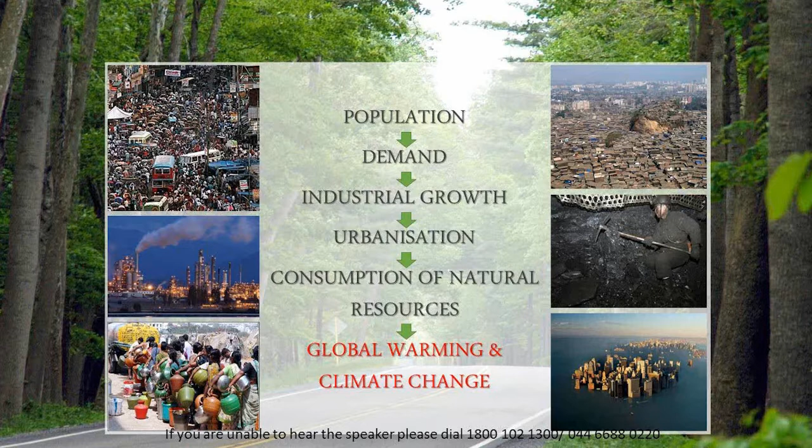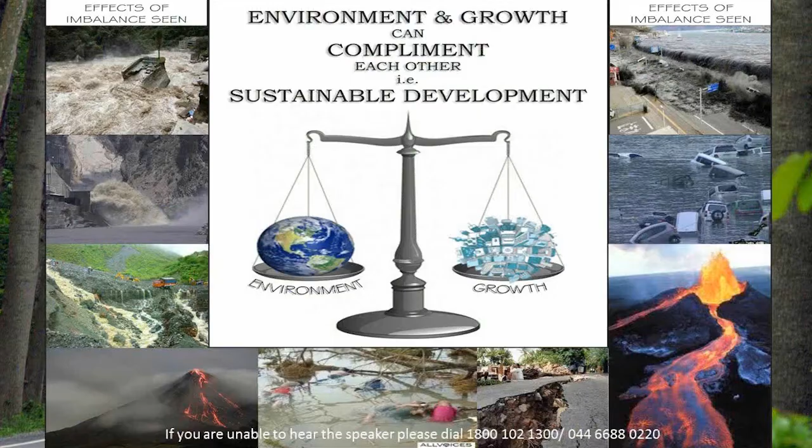But let us understand, environment and growth can complement each other. This is the need of the hour, that is sustainable development. It's the very best solution we have. This is green buildings, which is the best solution.

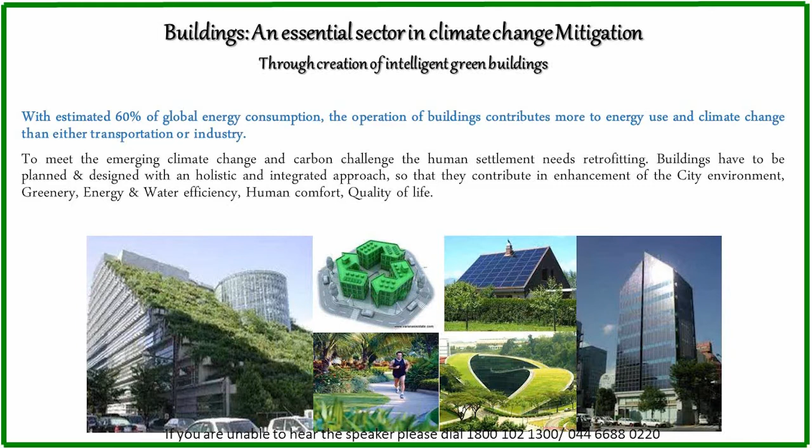With an estimated 60% of global energy consumption, the operation of buildings contributes more to energy use and climate change than either transportation or industry. Very strange. So to meet the emerging climate change and carbon challenge, human settlements need retrofitting. Buildings have to be planned and designed with a holistic and integrated approach so that they contribute to enhancement of city environment, greenery, energy and water efficiency, human comfort, and quality of life for all of us.

Do we know all these missions of the country? India's national plan for climate change has 8 missions. If you see the 8th mission, that's about the National Mission on Sustainable Habitat, which talks about the need of green building design practices with an integrated and holistic approach to achieve this target. So green buildings will contribute a lot to the action plan for climate change and sustainable development of the country.

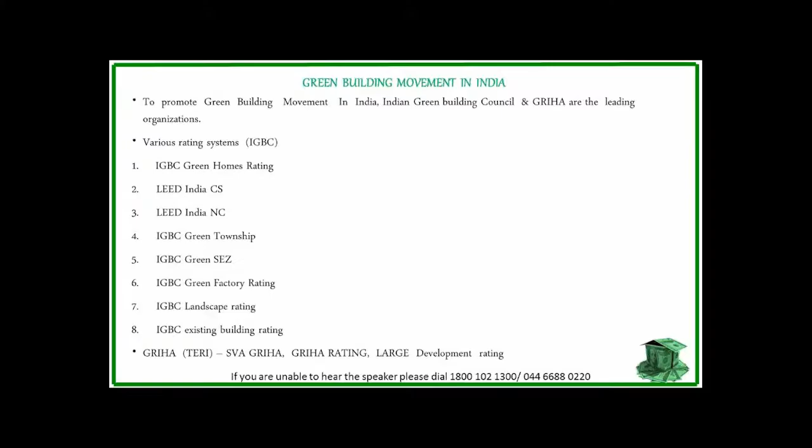Let us understand the green building movement in India. To promote the green building movement in India, there are 2 organizations: one is Indian Green Building Council, and GRIHA. These are the leading organizations working tremendously in the green building movement in India.

Various rating systems have evolved with the help of all stakeholders from the construction industry. They are specifically for different categories of projects, like IGBC Green Homes Rating, LEED India Core and Shell, LEED India New Construction, IGBC Green Township—that's for infrastructure as well—and IGBC Green SEZ, IGBC Green Factory Rating, Landscape Rating, which is newly launched, and a very new existing building rating system which is just launched last month.

During the Township Conference, and for GRIHA in India, we have SVA GRIHA for smaller projects, where your project size is less than 2,500 square meters. GRIHA rating is applicable for residential, commercial, government buildings, and various institutional buildings.

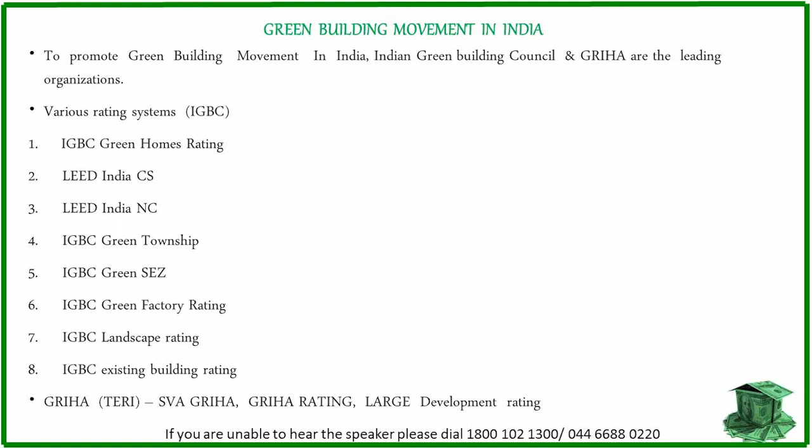There is also a new rating system currently launched by GRIHA, for larger development. It is applicable for buildings where you need environment impact assessment, where your plot size is bigger, and your built-up area is more than 1,50,000 square meters. So that is basically a larger development, and this rating also complements the Environment Management Plan of the EIA notification 2006.

Now let's have a quick view of the IGBC certified projects across the country. Currently the number is very big, exceeding more than 350 certified buildings, and 2 billion square feet is already registered with IGBC green building. So the movement is going on very nicely.

Let's have a look at the GRIHA certified projects. It also covers residential, individual homes, commercial development, townships, and even government buildings.

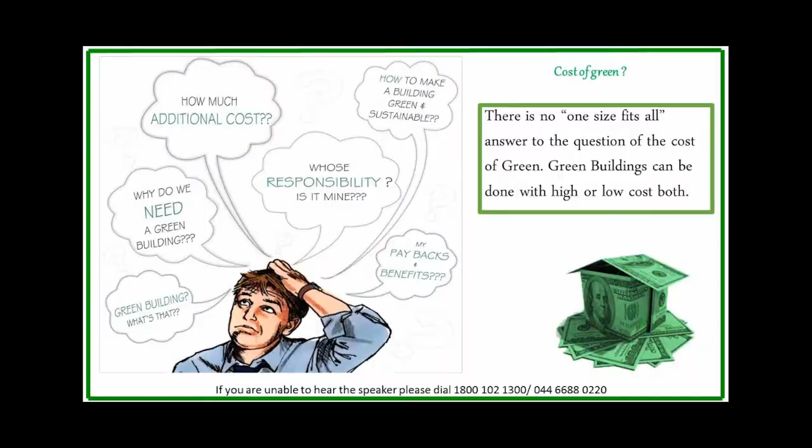Now let's come to the topic of the presentation, which was about the cost of green. There is no one-size-fits-all answer to the question of the cost of green. Green buildings can be done with high or low cost, both. It depends how we design, it depends on the expertise, it depends on the competence level our project team has, and whether they have a better understanding about the sustainability parameters.

When we design a building, the first question that comes to mind is: how much additional cost? How do we make a building green? What is green, what is sustainability, and whose responsibility is this? Is it me, the developer, the occupant, or the government—who?

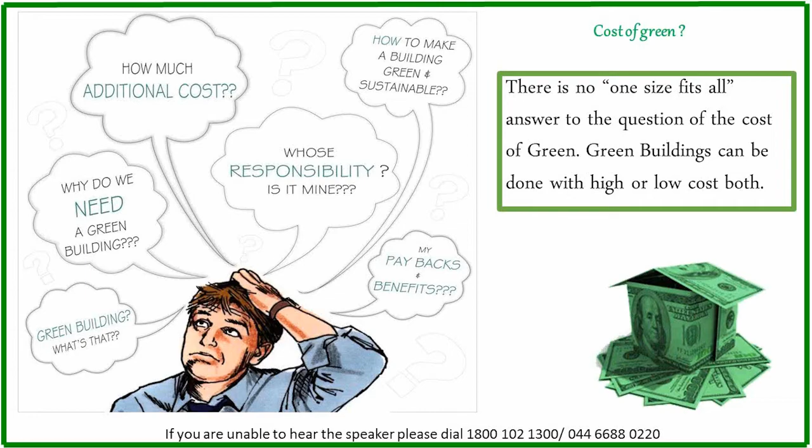So let's talk about the stakeholders of the construction industry. Is there any one single stakeholder, or are we all stakeholders? We have identified construction stakeholders which cover government also, who provide policy for construction, building codes, etc. They basically regulate and monitor, identifying policies at the regional and central level. So government is also a very strong stakeholder.

And building users who are finally going to stay in the green building - they also need to be educated, they need to know about green building. Then other stakeholders are the developers. Here the commitment of the developers, their intent to make a green building, is very important, along with the management system approach of the company.

Then architects - how the architect understands design sustainability parameters in the planning is very important. And the rest of the team, like expertise in environmental planners, master planners, infrastructure planners for larger development, and MEP consultants - we need various experts on board when we plan a project. Even when we start construction, we still need a better educated execution team.

They also need to understand the meaning of compliance, their role and responsibility, including our product manufacturers and suppliers. Because the product they are supplying - what green the product is, what is the value of recycled content, embodied energy - we need to understand all the technical specs of the products. So product suppliers should also be well competent in understanding sustainability parameters.

Now let's talk about integrated approach and planning for green building design. Do you think this approach leads to escalated project cost? My answer is no. In fact, this approach minimizes the regulatory risk in planning and also supports climate change mitigation measures. This approach also adds value in the project by providing long-term paybacks and benefits in terms of energy and water savings, and it defines social responsibility, contributing to sustainable development and green economy.

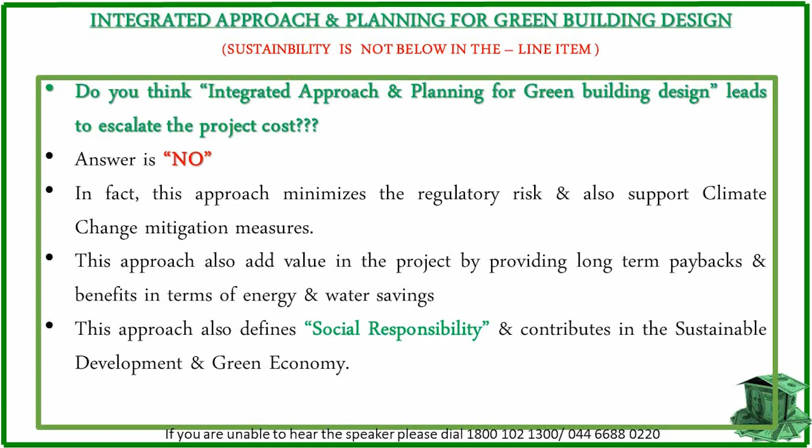So overall, the integrated approach and planning for green building design solves a lot of purpose in the planning itself. Sustainability is not a below the line item, it is a top priority in planning. Global studies done by various experts across the world prove that green buildings do not require additional cost if the design project team has thorough knowledge of green and sustainable parameters and the capability to integrate these features in the planning stage of design.

So the perception of additional cost remains in the mindset of only those people who consider sustainability parameters as an additional feature in the project. When establishing a design and budget for a green building, the key point to remember is that sustainability is a program issue rather than an added requirement.

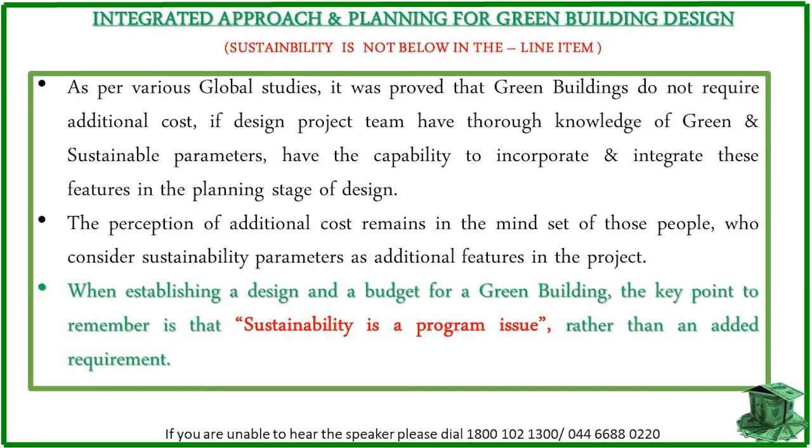The first question in budgeting should not be how much more will it cost, but how will we do this - that is more important for us. This must be done as early as possible in project planning, and considered at every step of design and construction. So we have various strategies, like we need to establish team goals, identify the team of experts we need in planning, and the expectations from the experts also need to be identified.

The kind of experts we need on board, like architects, environmental planners, MEP experts who will look after our HVAC design, plumbing design, water management system, energy management system, landscape designing, and site analysts who give us idea about the site topography and environmental parameters and its impacts on the site. So it's very important to identify the team of experts in the planning.

So that's the integrated approach - we need a complete team on board rather than just a single architect. That means a holistic approach for integration of all sustainability parameters in the planning when we start a project. Understanding of site is very important, understanding of building footprint is very important - this makes our project in a true sense a sustainable model.

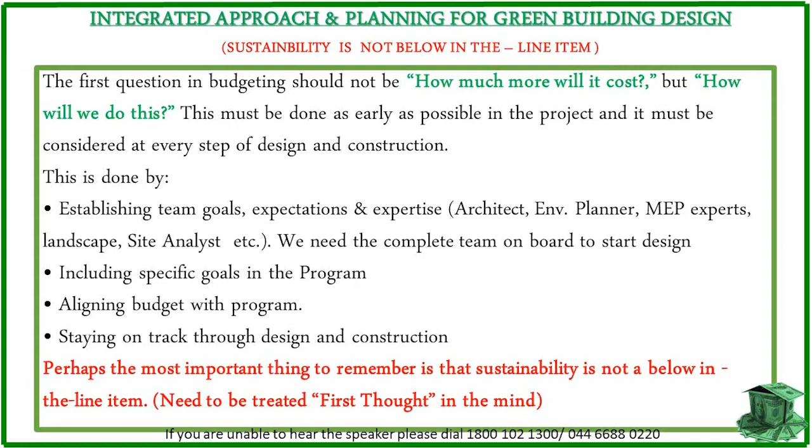Perhaps the most important thing to remember is that sustainability is not a below the line item. It needs to be treated as a first thought in the mind when we start planning any kind of project, whether smaller size, medium size, or a larger development.

Let's talk about synergy of cost with current environmental policy and design regulation codes in India. There is no doubt that better understanding of environmental policy and applicable design regulations and building codes available in each region of India currently to incorporate specified sustainability parameters of the policy and regulations in the planning stage itself will automatically lead to define the exact cost of the project planned.

Because everything is well planned and it's a part of your planning, whatever you need as per the legal bylaws. So we are not avoiding any condition or any parameter which was part of your legal codes. Hence, there is no point of additional cost if you know how to incorporate all those building codes and design codes mandatory as per the legal bylaws in the planning.

There is a notification under EIA, Environment Impact Assessment, by the Ministry of Environment and Forest. Environmental clearance is mandatory for all construction projects having built-up area, meaning total covered construction area, more than 20,000 square meters. That means if your construction area is more than 2 lakh square feet, environmental clearance is mandatory for you to get from the state environmental appraisal committees.

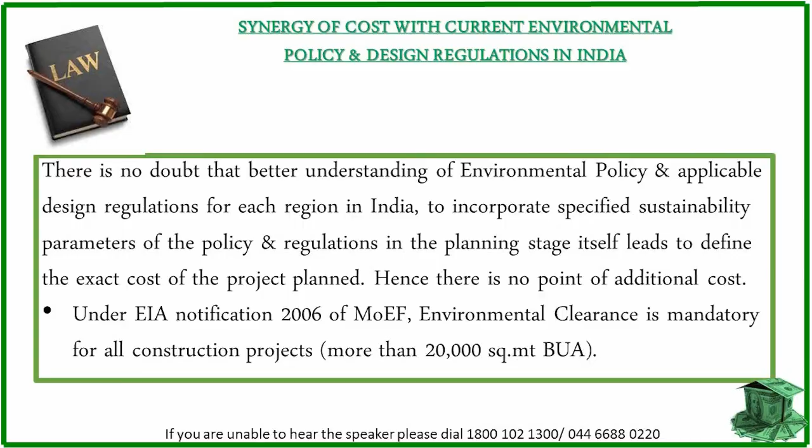The following sustainability parameters have already been covered as a mandatory protocol of project design and implementation in India, which covers site planning. Site planning has to be as per the National Building Code, which itself talks about your topography, the landscape design during construction and post-occupancy, soil erosion control measures, and the sedimentation control plan. So all site planning as per environmental conditions is already covered in the National Building Code.

Not only this, there is another chapter in the National Building Code now which purely talks about sustainability parameters and how to do sustainable development. It covers all the parameters. Even in design planning, as per the current National Building Code, we need to understand climatology and orientation of the building. Then for energy management and design, we need understanding of the Energy Conservation Building Code, so we can design our building envelope efficiently with energy efficient technologies.

Water management and design is also covered by the National Building Code, Bureau of Indian Standards, and Central Pollution Control Board, which talks about water quality norms for potable water, wastewater quality norms, treated water norms, and even irrigation water quality parameters. So all these codes are there, only the challenge is the implementation.

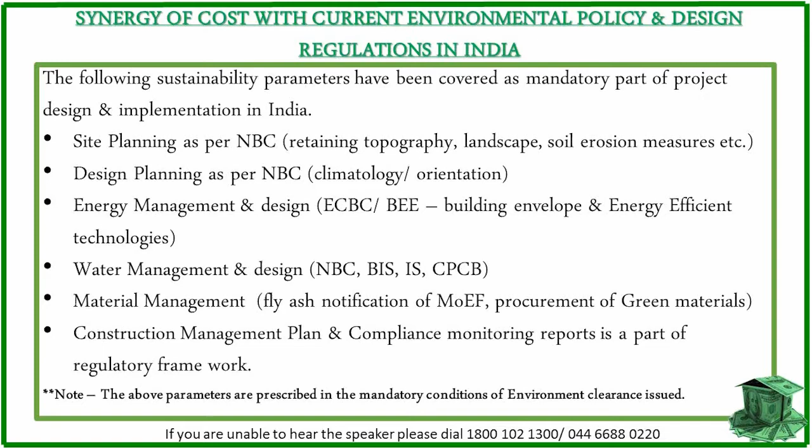In fact, environmental clearance conditions clearly define that the occupancy certificate should not be issued to a project until all environmental infrastructure and sustainability parameters have been installed, commissioned and validated by local corporation bodies. So such an important thing is already in place in the legal codes, but we need to address the challenges.

There is a lack of environmental policy awareness in the architectural education system, because most architects don't know about environmental policy. I'm not talking about experienced architects, but the young students who are studying now. They need to be educated. The intent of developers to implement required mandatory norms is also very important, and understanding of paybacks and benefits for the developer is also important. Government incentive schemes may encourage the same.

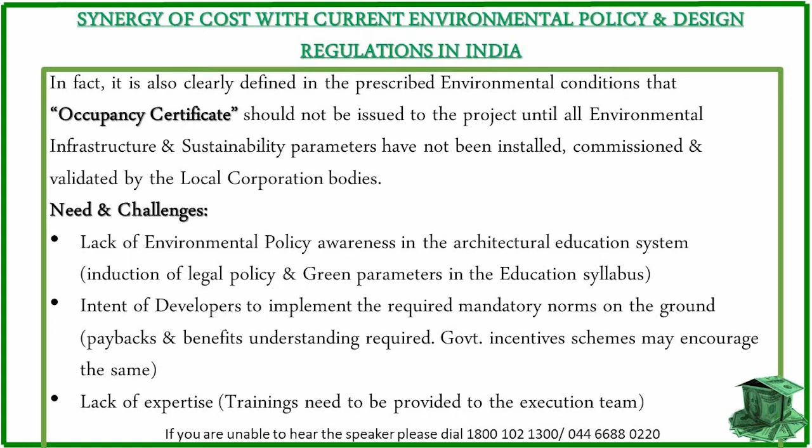There is also a lack of expertise. Training needs to be provided to the execution team. Then who will provide the training? There are so many challenges.

Even so, if you see current regulations in India, some states, I would appreciate, have already initiated incentive schemes for their regions to encourage sustainability. Like in Gujarat state, government has a mandatory rainwater harvesting policy, a mandatory solar policy, and integrated water management facility for recycling and reuse of wastewater rather than installing individual sewage treatment plants for individual buildings, which is very good sustainable infrastructure. Hopefully this kind of infrastructure can be developed and we can follow the same model for other states.

There is also an import-export solar policy in Gujarat which provides 9 rupees 47 paisa in return for generation of 1 unit under the export policy of renewable energy directly connected with the grid. It's a win-win situation for the developer or any building using its roof for solar generation connected to the grid, getting energy at 5 rupees per unit and supplying it at 9 rupees 47 paisa, which is a very good payback received monthly.

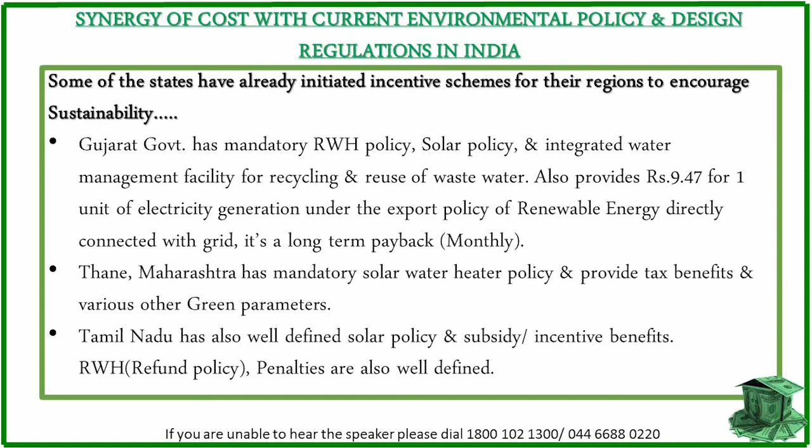Let's come to Tamil Nadu. It already has a well-defined solar policy with subsidies, incentives, and benefits for people following this policy, and even a refund policy in rainwater harvesting. But remember, penalties are also well defined in Tamil Nadu, which is important because in India there is a chalta hai attitude - unless you have penalties, people don't follow the rule. I hope the Tamil Nadu government has thought about that.

Now let's come to Bangalore. There is a water supply and sewerage board that has decided on tax rebates on rainwater harvesting filters, meaning relaxation on VAT for key components used in installation. What a beautiful incentive - at least this encourages people to follow sustainable technologies and comply with practices. There are also tax rebates for implementation of solar water heaters, and 30% of the total connected load of the common area has to be integrated with renewable energy. That is also a mandatory policy in Bangalore.

Then let's come to the Uttarakhand Electricity Regulatory Commission. They also provide a 60% subsidy for solar water heaters.

Then let's come to Maharashtra again. In Pimpri Chinchwad Municipal Corporation, there is a rebate in property tax and builder premium for green buildings. You get 10% rebate for a 1-star rating, 50% for 2-star, 75% and so on, depending on the rating achieved in certification. This is currently for GRIHA rated projects, and MNRE incentives have already been identified for GRIHA rated projects.

There is another scheme by a financial institution - I would appreciate State Bank of India for providing a 0.25% concession in interest rate for occupants buying green buildings. I hope other financial institutions in India also adopt these kinds of initiatives so that green building can be really promoted in a true sense.

I would conclude like this: incorporation of all sustainability parameters defined per legal regulations into the design planning itself leads to creating an integrated design approach. By involving all the stakeholders we need in planning - experts, planners, architects, environmental planners and others - on board during planning, and complementing the requirement of green building norms in the project design, it definitely reduces regulatory risk and leaves no option for adopting green separately.

That means green becomes an integrated part of your planning, not something additional. So legally compliant projects have no additional cost. And who wants to take risk? Everybody has to understand the importance of legal compliance. And beyond legal compliance, if we pursue this green initiative voluntarily as well, I don't think there's any harm in that. Finally, we are thinking about our future generation and for better quality of life, because we also need a better quality of life.

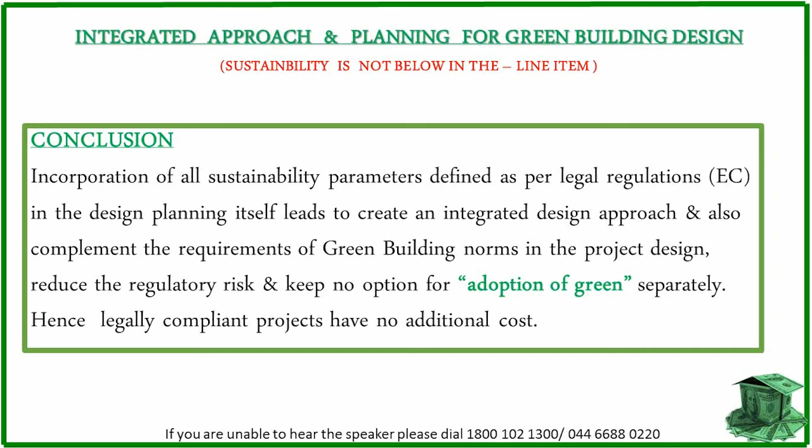Let's come to green building and glazing compliance for sustainable design and cost efficiency. Can we assume a building without any opening, with no outer connectivity? My answer is no. Then what do we need? An adequate material in the building opening which can allow us to view the outer world and also reduce heat gain. That is glass. Everybody knows that. Otherwise how will we see outside? What is the function and connection between outdoor and indoor environment?

Glass is an excellent green material if used intelligently. Please remember, if used intelligently, it is a very excellent green material. We already have a wide range of materials available in the market, which if used in our project design, provides a great amount of natural light in the building to energize the interiors. Glass in the building substantially reduces the need for artificial lighting and allows daylight to light the interiors. It leads to higher energy efficiency in green buildings. It reduces the HVAC load also, because it reduces heat gain, which is the most important thing in Indian climate. It can also be used in residential, commercial, any kind of structure, because basically it is setting a connection between indoor and outer environment, which is the need of our health and for our better quality of life.

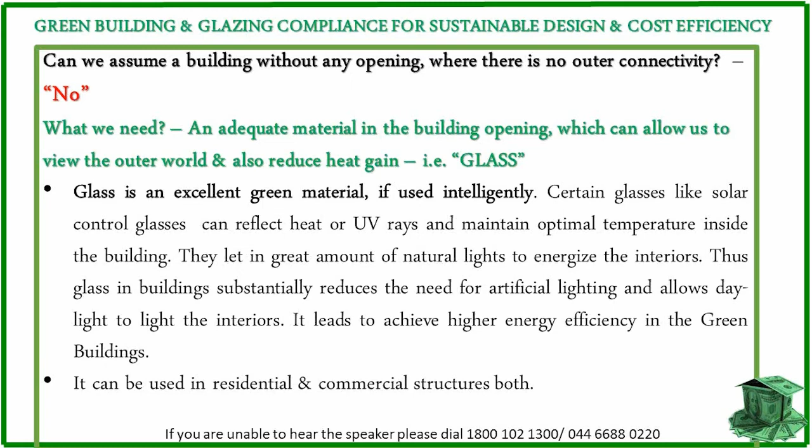Now let us understand how to select a glass - how to choose an appropriate glass for my specific design building. Let us understand that glass selection has to be specific for the design. It is not common, it has to be based on the region where I am designing a building.

We have different climate zones in India. If you see the National Building Code, we have 5 climatic zones of India. We need to understand building orientation and wall window ratio. These are very important parameters when we procure glass for a particular building or particular type of glazing we need. For building orientation, we need to understand that the larger facade should be in north and south, and buffer spaces in the west and east. These are some green principles, and sometimes we may follow them or may not. It depends upon the site conditions and your own needs as well as the design.

Wall window ratio is the ratio of vertical fenestration area to the gross exterior wall area. So wall window ratio is a very, very important parameter for the selection of glass.

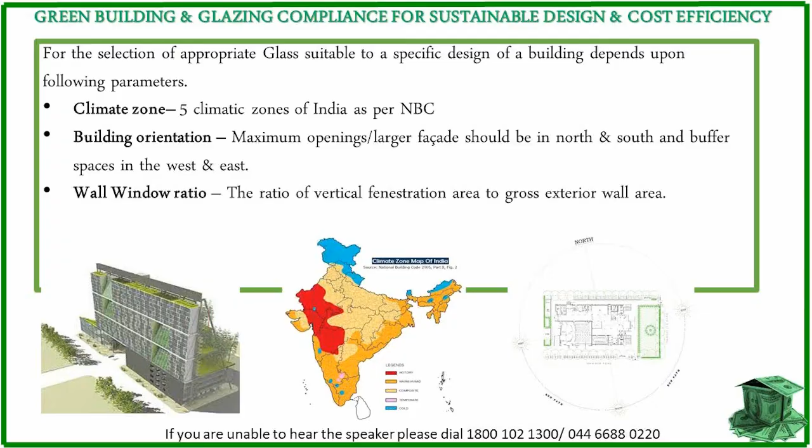Then solar heat gain coefficient - it is a ratio of solar heat gain entering the space through the fenestration area to the incident solar radiation. Typically it ranges from 0.9 to 0.1, where the lower value indicates lower solar gain. So if your SHGC is lower, your U value is lower, you are basically reducing your heat gain. So finally what we need is reduction in heat gain - this is what finally we need as a green and sustainability parameter in the green building.

Shading also plays a very important role. Our shading strategy reduces insolation and heat gain. We have various strategies available like pergola, chhajjas, jalis, overhangs, green wall or plantation on east and west side. These are the various strategies for shading if we comply in the green building when selecting the glass. So I think we need an integrated approach.

If we have a better understanding of all these parameters, definitely we can choose a better glass for the building. So finally, in true sense, I can say the glass is green if we select it intelligently by doing proper simulation and analysis studies.

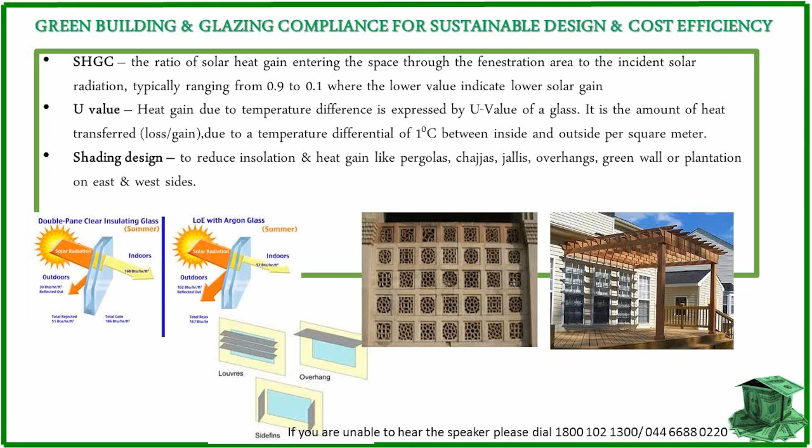There are various compliances. As I said, we have the Green Building Standard of Indian Green Building Council, and Indian Green Building Council has 2 standards for green homes. Earlier version was 1.0, but the 2.0 version has been introduced now. In the 2.0 version, there is an Annexure 1 which talks about 2 kinds of approaches - one is the prescriptive approach, the other is the energy performance approach. I hope the performance approach is more cost effective when we are designing glazing for a building.

When we do modeling and simulation for a building, based on when we want to achieve IGBC Green Home pre-certification or certification, we need a better understanding of these compliances, referring to the defined standards of the Indian Green Building Council.

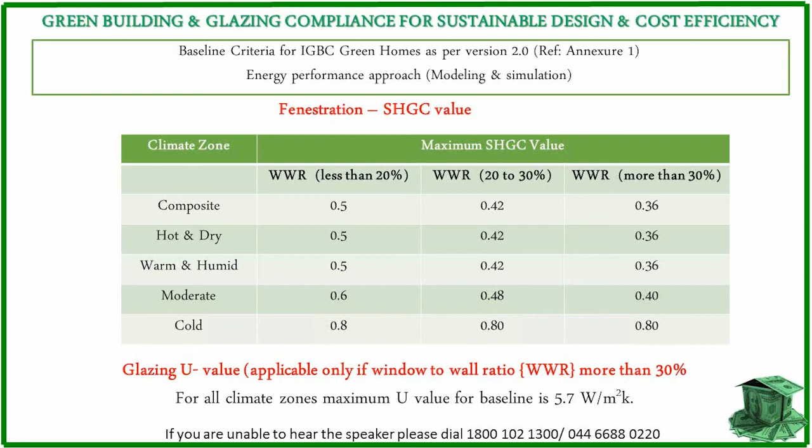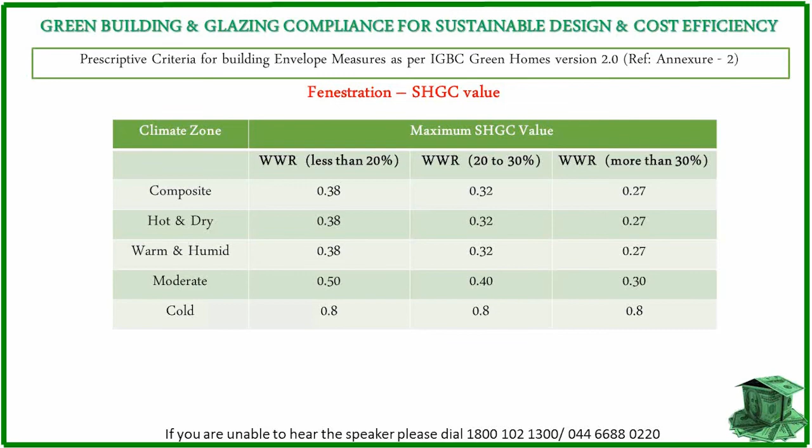Now the prescriptive criteria for building envelope measures as per IGBC Green Home version 2.0, that is Annexure 2. Here the SHGC value for various climate zones is well defined with respect to various wall window ratios: less than 20%, 20 to 30%, and more than 30%. You have to follow these values to achieve the pre-certification or certification for IGBC.

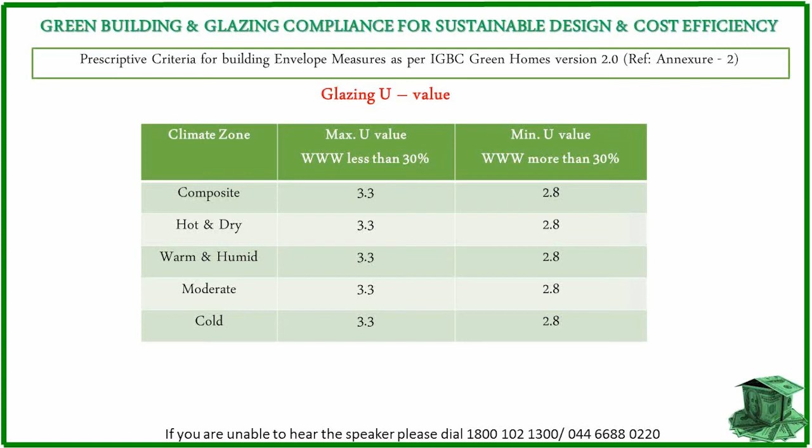Now let's talk about the prescriptive criteria for building envelope measures for glazing U value. This is only for the prescriptive criteria, not the performance approach. For various climate zones, the maximum U value where wall window ratio is less than 30% is a common value of 3.3. The minimum U value, if wall window ratio is more than 30%, is 2.8, which is common for all climatic zones.

Now, as per Energy Conservation Building Code 2007, this standard is applicable for GRIHA also, and for the Ministry of Environment and Forest EIA guidelines. It becomes part of your condition if you are getting environmental clearance from the State Environmental Committee or Authority under EIA, because ECBC has been given wide significance there to comply with building envelope designing. You need to submit a report to the ministry on what kind of building envelope you are designing, what U values, R values, and solar heat gain coefficient values you have, and it should match ECBC compliance. So ECBC becomes your regulatory compliance.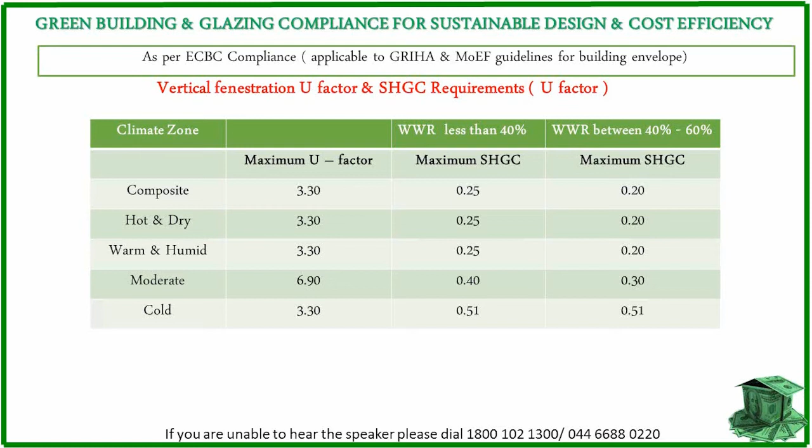In this table you can see the window wall ratio: where you have less than 40%, you can comply with various SHGC values for different climates, and where you have 40 to 60%, you have maximum SHGC in different ranges for composite, hot and dry, warm and humid climates already given in the table.

Glass with low U value and low solar heat gain coefficient gives good energy performance in tropical climate, whereas glass with low U value and high SHGC gives good energy performance in cold climate. Now, tangible and intangible benefits of glass.

Intangible benefits include creating a psychological connection to the outside world, and reducing visual fatigue, which affects health and increases productivity in the building. Tangible benefits include comfortable lighting conditions and reduction in the load on lighting power, which is basically the need of a sustainable model.

A daylight sensor reduces artificial lighting needs and increases the life of the fixtures, which is also very important in terms of cost, because if it increases the life of my fixtures, I need not pay more cost for that. So finally, it is again a tangible benefit of using this kind of sustainability technology.

Low U value and low SHGC reduces heat ingress, resulting in decreased HVAC load. We know commercial buildings have a huge load of HVAC in terms of energy consumption, so glass can play a very important role in reducing HVAC load if selected with intelligence. Glass also has recycled content and provides regional material credit.

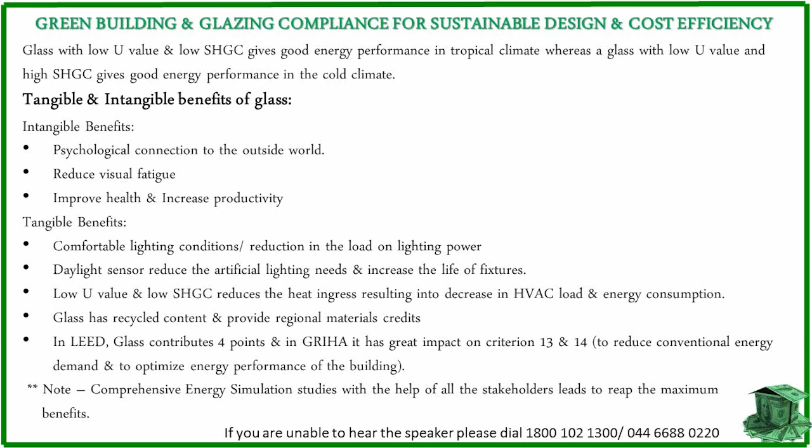Now, our next parameter is about the construction practices during construction as well as post-occupancy for the green building design. Do you think sustainable construction practices increase the cost? Because our topic is cost, we are evaluating how much cost for green building.

My answer is no. In fact, these sustainable practices, if we comply during construction as well as post-occupancy, will keep our site healthy, will not disturb the ecosystem, and will minimize the impact of project activities on the environment. Also conserve and preserve natural resources.

This will lead to increase in productivity, and a healthy and safer environment for construction workers and site project team during construction. And when our occupants occupy the building, even after occupancy, in green building we follow better practices in terms of operation of building. Even we comply with the building management system, follow better practices, and maintain the green building features properly and efficiently, we would still be able to maintain healthy and better indoor environmental quality in green buildings.

During construction, if we can manage a construction management plan, we design in the planning, and we already incorporate the conditions and guidelines to comply with all the sustainable practices required as per the green building norms. That may be IGBC, that may be GRIHA, or that may be your legal codes of MOEF or your local building codes, whatever is applicable to your state or your regional area. So I think then it becomes in true sense a sustainable construction management plan.

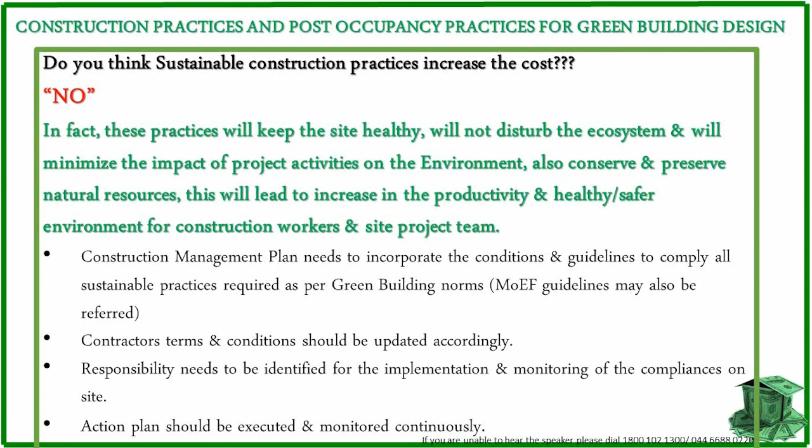I don't think we will be able to put any additional costs in following the sustainable practices, because this becomes a part of our behavior approach then. If we comply with all these practices, we understand the importance of it and we have the expertise to comply with it. And then our actions, our action plan, is executed and monitored. I think finally then we are creating a sustainable model and there is no additional cost then.

And then if you see, there are some practices well defined in the EIA manual of Government of India, Ministry of Environment and Forest, where it talks about all national building codes and best sustainable practices being adopted during construction and post-occupancy. If we are really able to comply, understand that, and train our people accordingly, I don't think there is any additional cost. It becomes our behavior approach.

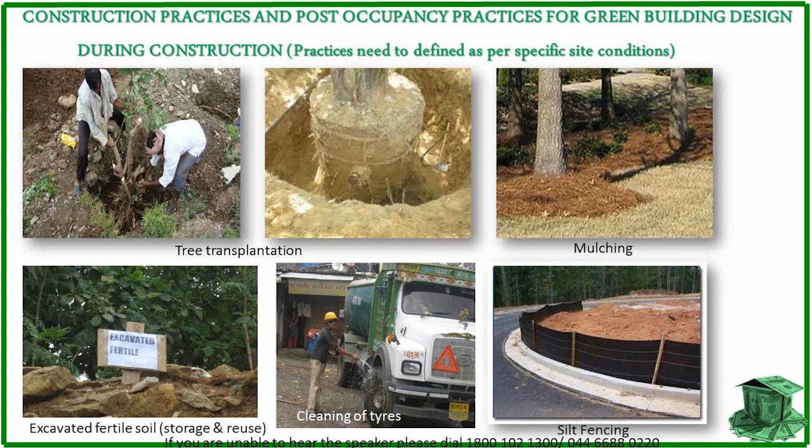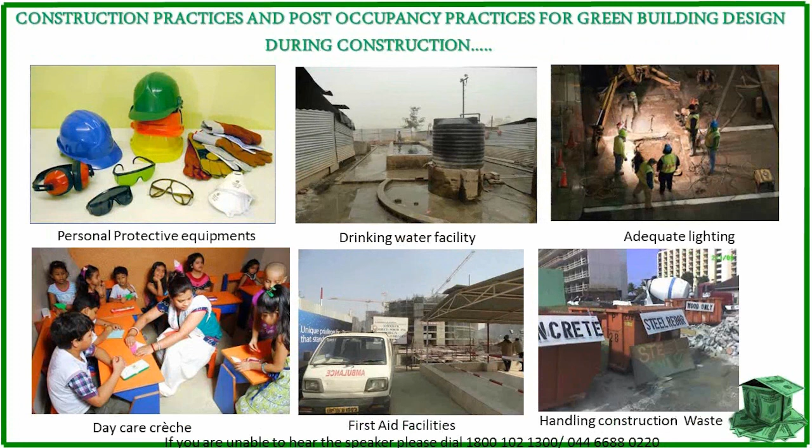Even the noise parameters, all environmental parameters I'm talking about, like silt fencing, because barricading also helps us a lot, because sometimes my project site will be in the residential area, so the other residential area will not get disturbance and dust emission will also be reduced. Now let's come to during construction we need better HSE management policies also, because health, safety and environment is an integral part of my construction management plan.